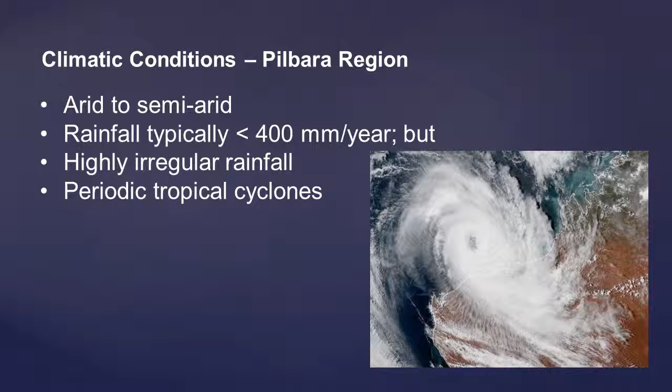The annual evaporation far exceeds the average annual rainfall, and as a consequence of this dry climate, the vegetation is very sparse. This lack of vegetation also helps contribute to the high rainfall runoff, where there's very little infiltration into the ground, and this results in very damaging flash floods during cyclone events.

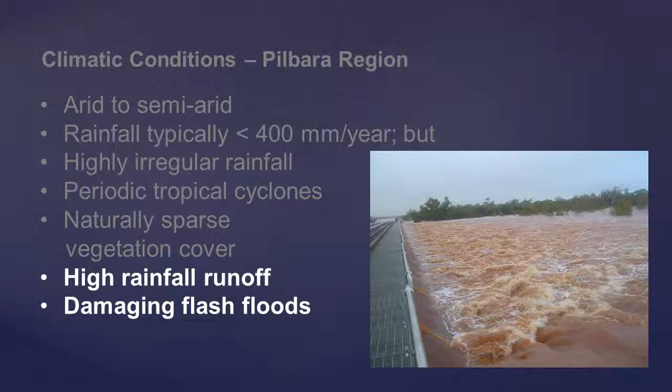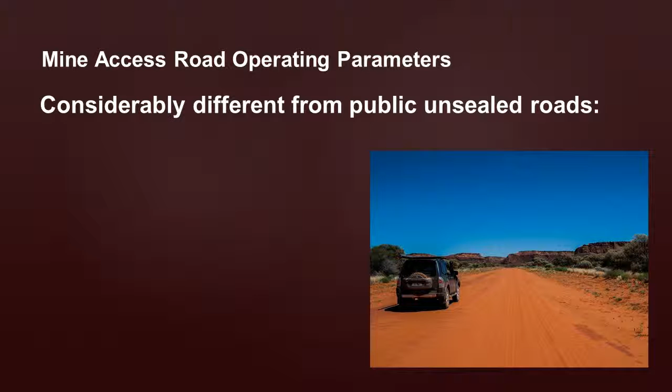As discussed earlier, the operating parameters for mine access roads can be considerably different from public unsealed roads. Mine access roads typically have higher traffic volumes, and the size of the heavy vehicles is typically larger than that of public unsealed roads, in that there are quite a high amount of B-doubles, triple road trains and oversized road transporters carrying equipment such as mine haul trucks or modularised ore processing structures.

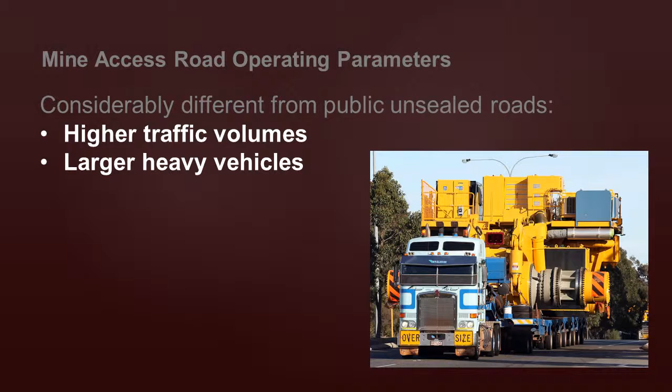The construction of new public unsealed roads in most cases is unlikely, as the network is already essentially established in Australia. However, the construction of new mine access roads is commonplace, and these are usually carried out in conjunction with and secondary to the development of other adjacent mining infrastructure such as processing plant, railways, roads, etc., and hence why these specifications are adopted.

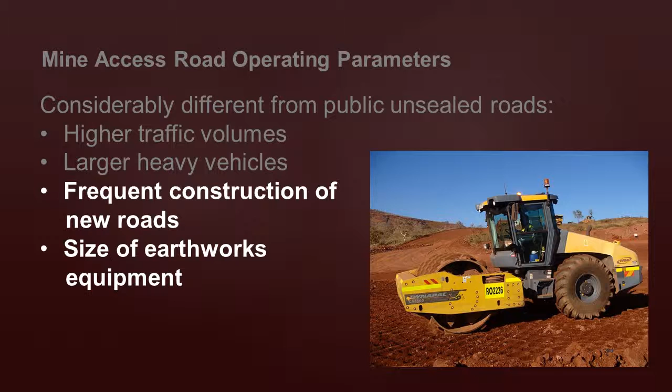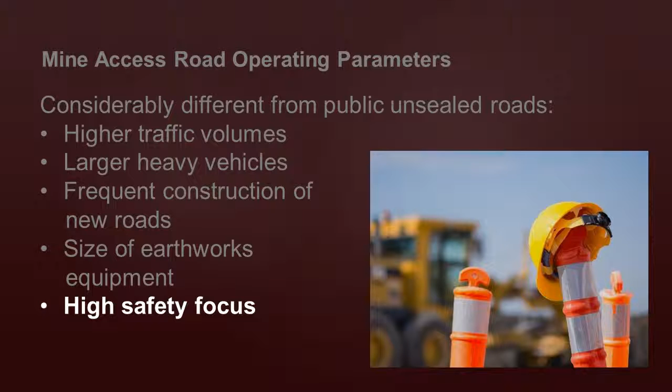Mine sites also have a very high focus on safety, which we shall discuss in the following sections. Speed limits on mine sites are often below 80 kilometres per hour.

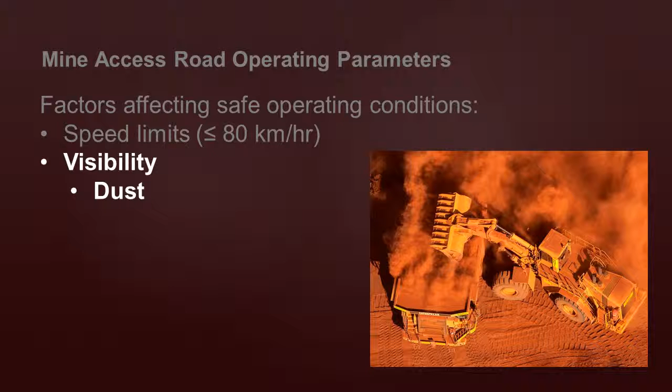Excessive dust is quite a significant concern in the region, and that's exaggerated by the lack of rainfall in the region. Sun glare in combination with dust is also a significant issue, especially with the long working days, meaning that a lot of the driving is done at dusk and at dawn, and this can severely impact the driver visibility.

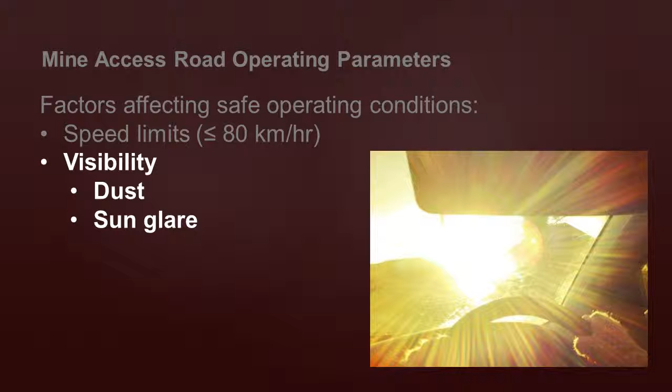And obviously the frequency of road maintenance and the material properties that make up the unsealed roads are key factors which affect the safe operating conditions.

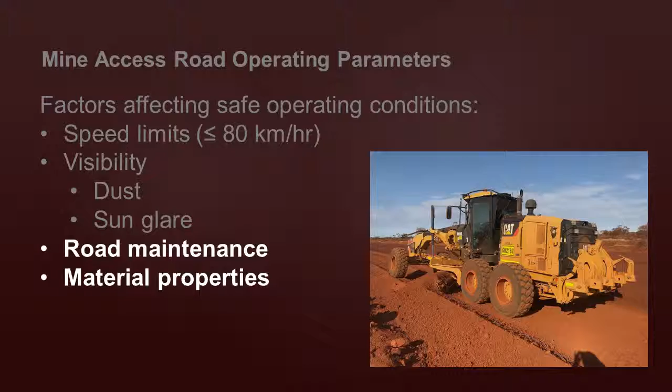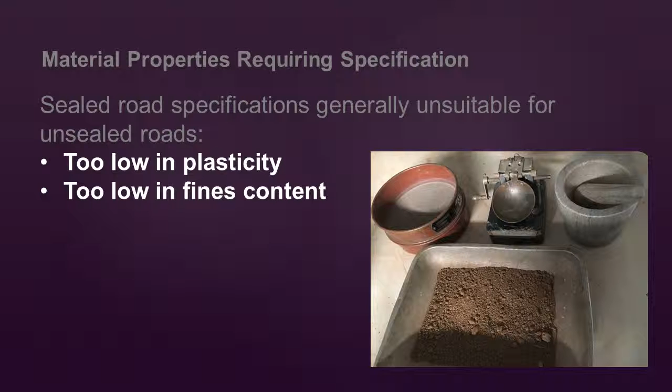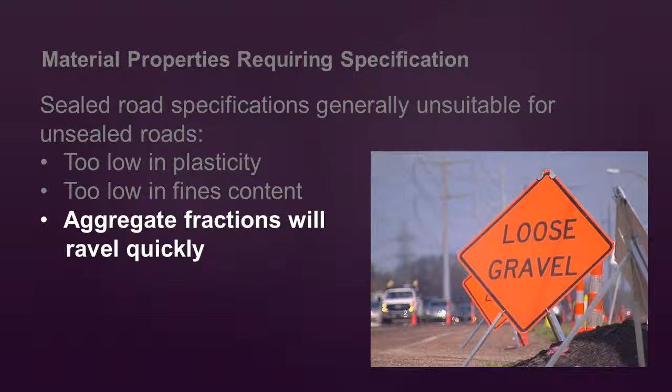Sealed road specifications are generally unsuitable for unsealed roads. That's because they are usually both too low in plasticity and too low in fines content. Consequently, if sealed road specifications were used on unsealed roads, it's expected that the aggregate fractions would ravel quite quickly.

For this study, the material properties requiring specification typically include the maximum particle size, the soil grading, the Atterberg limits in the form of the plasticity index and the linear shrinkage, as well as the bearing strength, which is assessed by the California bearing ratio test.

The reason for carrying out these tests is that they are fairly simple and can be carried out on a site-based laboratory and are relatively inexpensive to do.

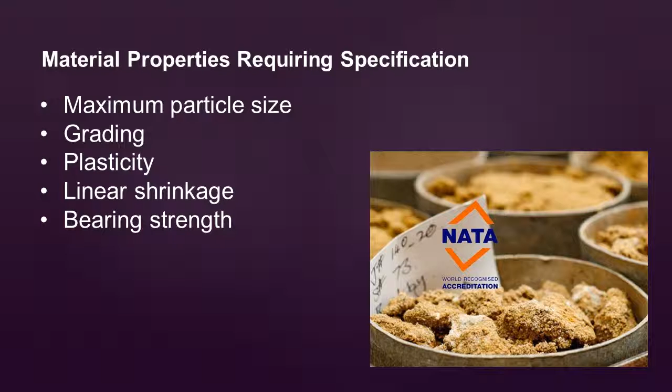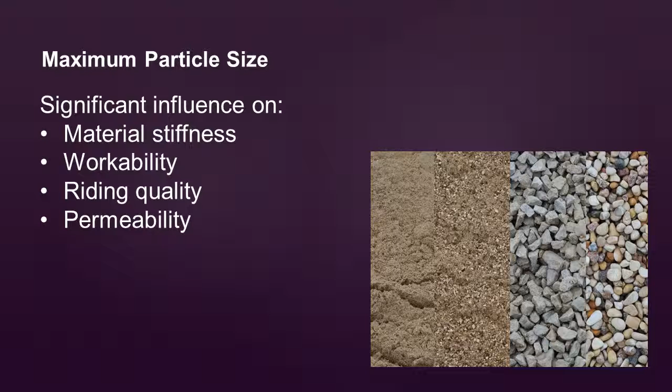The maximum particle size of a material is significant as it influences the material stiffness, the workability, the riding quality, and the permeability of a material. The maximum particle size will vary for the different layers of an unsealed road, but typically are less than 40 millimeters for wearing course layers, but can be coarser for the underlying base course or subgrade layers.

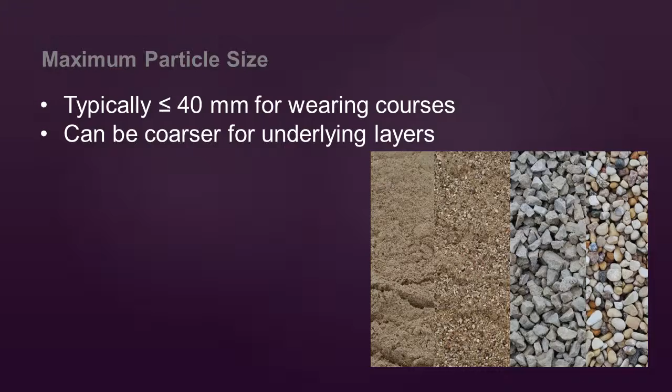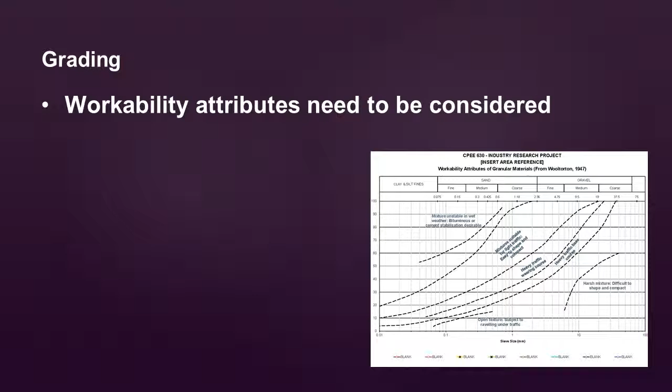For the soil grading, we also need to consider the workability attributes of a material, and we can use the adjacent chart to do so. If the material is too coarse, we effectively have a harsh mixture which is difficult to shape and compact. But if it's too fine, then it's unsuitable, especially for higher traffic loads.

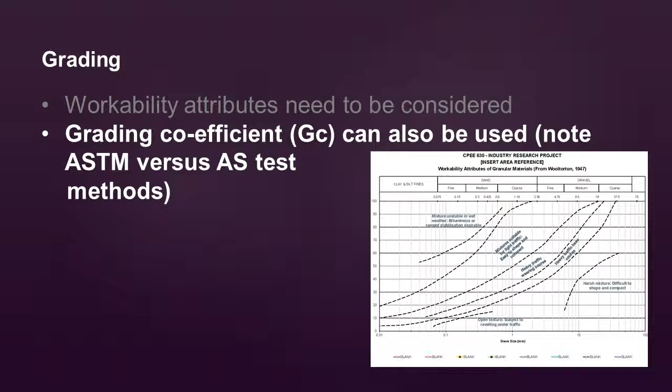The grading coefficient is a concept that was developed in South Africa, and this can be used in conjunction with the shrinkage product, which we'll discuss later, to effectively assess how a material may behave as an unsealed road wearing course layer. It should be noted that because it was developed in South Africa, it uses ASTM test methods which use different sieve sizes to Australian standards, so this needs to be adapted to Australian conditions.

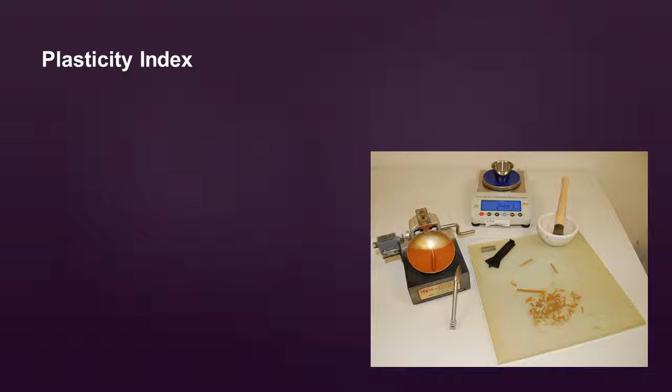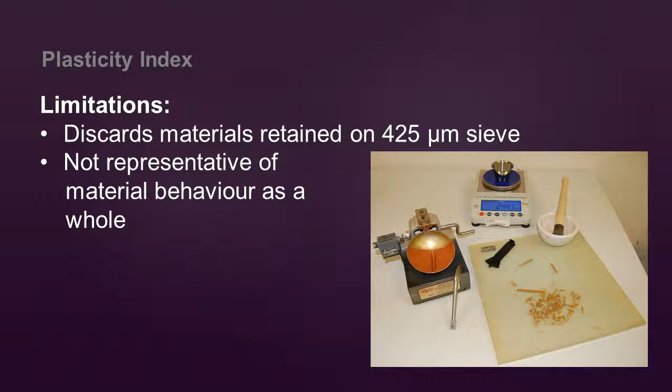The plasticity index is essentially used to assess the behaviour of the fines component of a soil material. The plasticity index method is slightly limited in that it discards materials retained on the 425 micron sieve, and therefore it is not representative of the material behaviour as a whole.

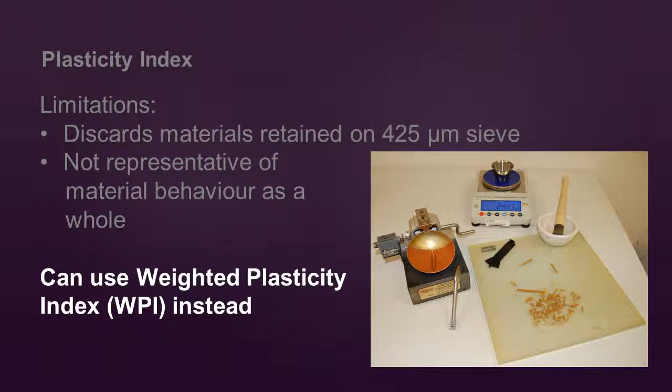Instead, we can use the weighted plasticity index method, where the PI value is multiplied by the amount of material passing the 425 micron sieve. The following table shows that the WPI value for wearing course and base course layers can be around 400 to 500 for low rainfall areas.

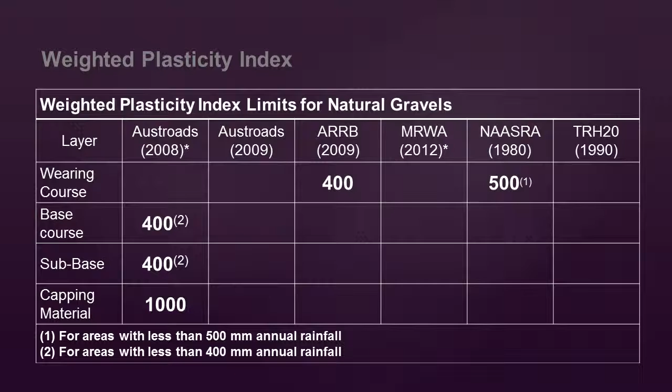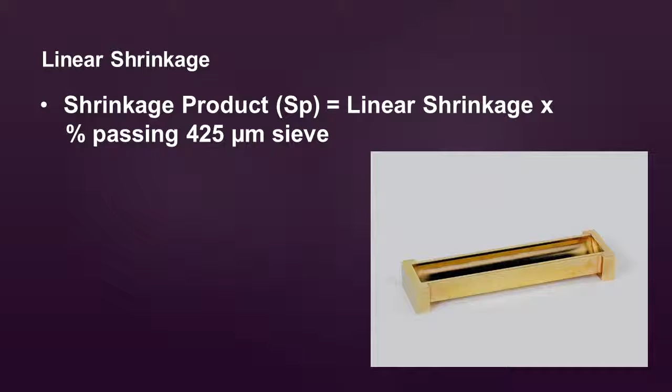As with the WPI, the shrinkage product can be used to assess the linear shrinkage relative to the percent passing the 425 micron sieve. The shrinkage product can be used in conjunction with a grading coefficient to assess the likely performance of a wearing course material, and it can assess for potential defects such as erodibility, development of corrugations or raveling, or slipperiness of a material.

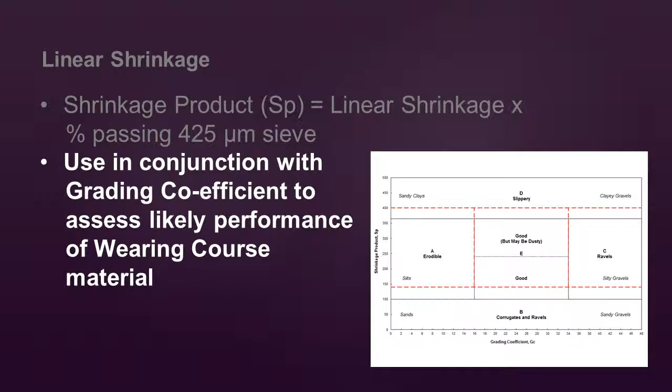As with the grading coefficient, there are differences between the ASTM test method used in South Africa and the Australian standard test method for linear shrinkage.

The ASTM bar linear shrinkage method uses mercury, however this practice has been discontinued in Australian labs and several other countries for health reasons. The original author of the wearing course performance chart shown did, however, publish a revised chart for the British standard method for linear shrinkage.

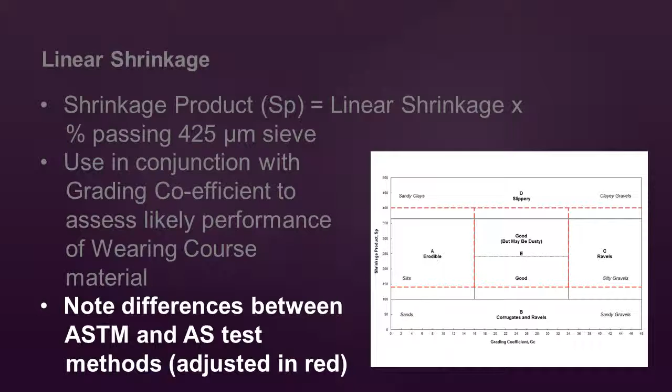This is shown by the red dashed lines. The only major difference here is that the Australian standard and ASTM methods use a slightly different size mould. The Australian standard one is slightly longer. So for the interim, the adjustment shown by the red dashed lines has been used, but it's recommended that an Australian standard correlation be developed in future.

And the final material property requiring specification that I'll discuss is strength. The soaked CBR test is a relatively simple test to carry out, and the values for unsealed roads are typically lower than for sealed roads, which use a CBR value of around 80%.

By using a lower value, it allows us to make the most of locally available materials. Typically we would use CBR values no greater than 40% for the wearing course materials and no greater than 60% for the base course materials.